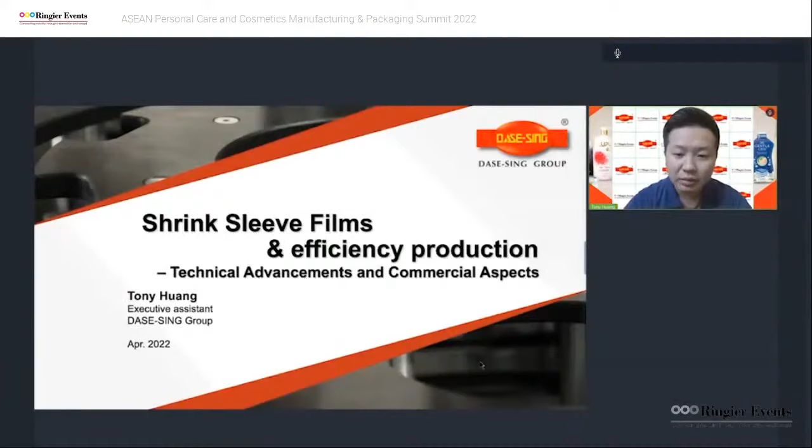Firstly, the presence of DASE-SING. We have 3 factories: one in Chiayi, Taiwan, one in Hsinchu, Taiwan, and the last one in Shanghai, China. We have been established since 1985, we have 200 plus employees, and we have marketed in more than 80 countries.

So now brands are looking for ways to engage with consumers and increase return on marketing investment, cut cost, and optimize the supply chain. Also connect digital campaigns with the real products, reduce time to market, and be eco-friendly, which is the big issue right now.

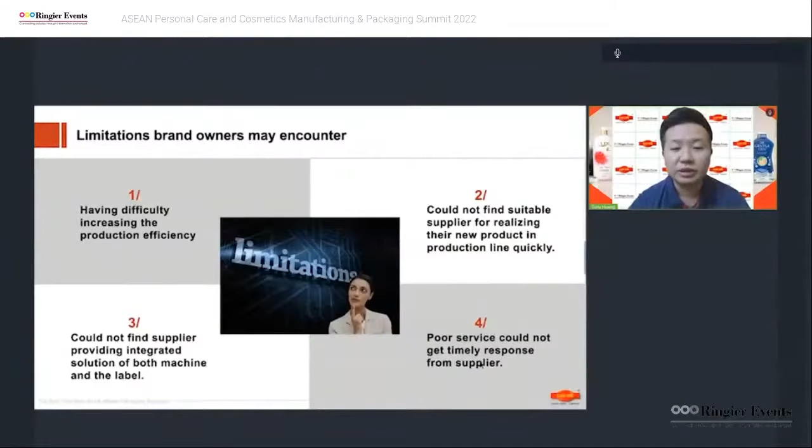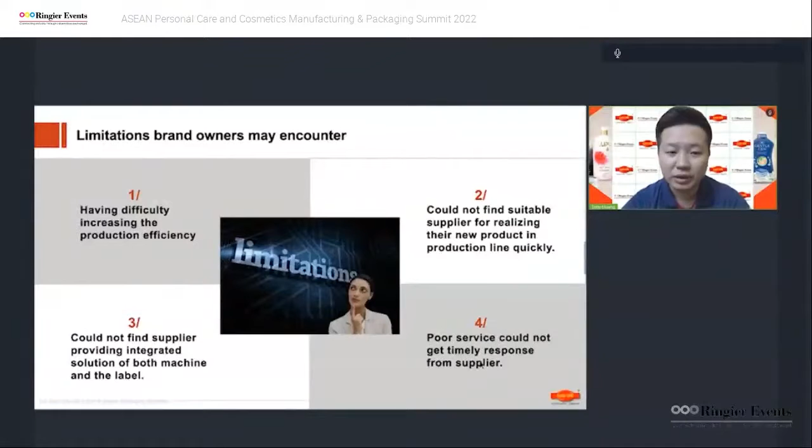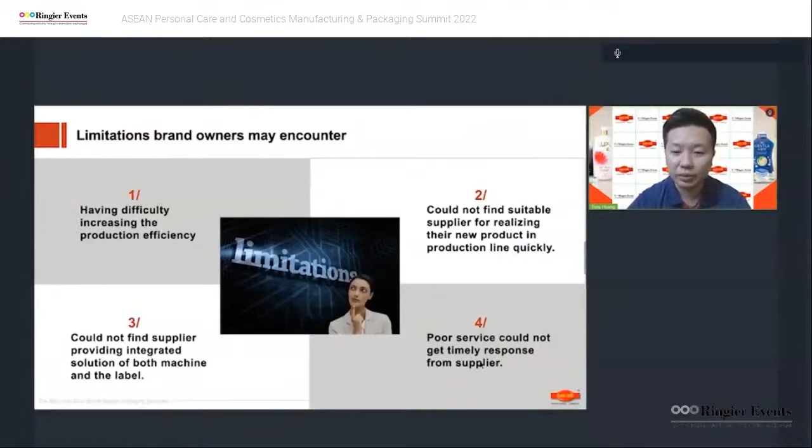Here are some limitations that brand owners may encounter. Firstly, having difficulty increasing the production efficiency. Secondly, could not find a suitable supplier for realizing their new product in production line quickly. The third one will be could not find a supplier providing integrated solution for both machine and label. Lastly, poor service, could not get timely response from supplier.

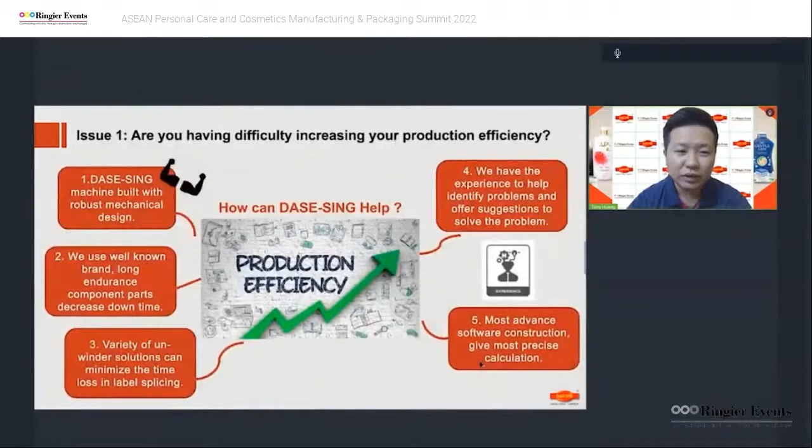So for the first issue, how can DASE-SING help? Firstly, DASE-SING machines are built with a robust mechanical design, and we use well-known brands of components which provide long endurance to decrease downtime.

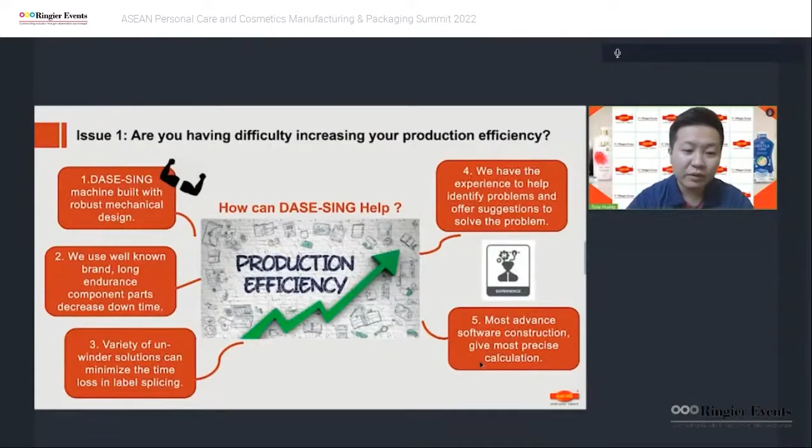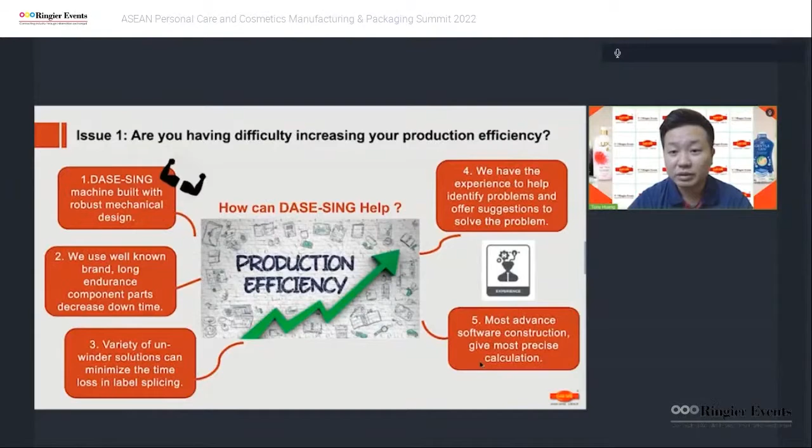We have a variety of unwinder solutions that can minimize the time lost in label splicing. We also have the experience to help identify the problem and offer suggestions to solve it quickly, as we have experience in both machine and label. And lastly, because we have the most advanced software construction, we give the most precise calculation.

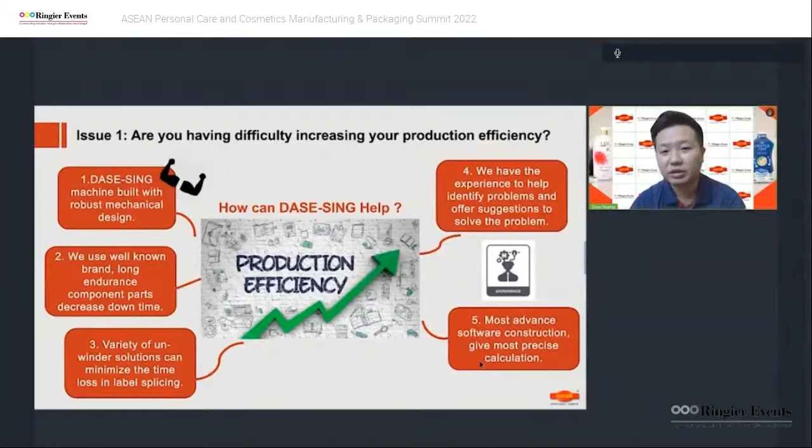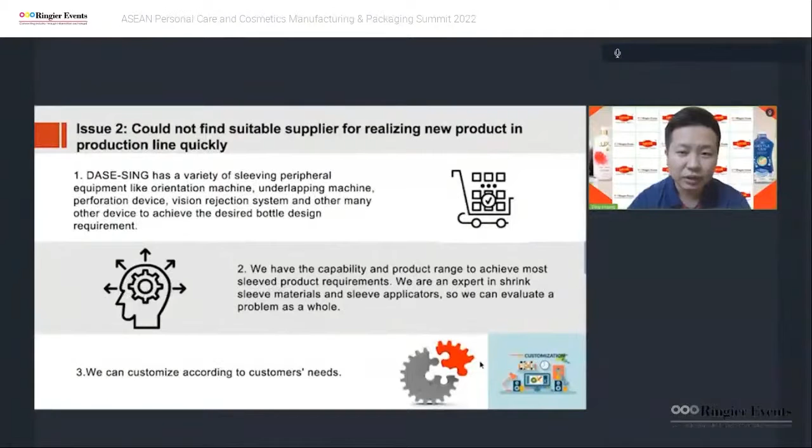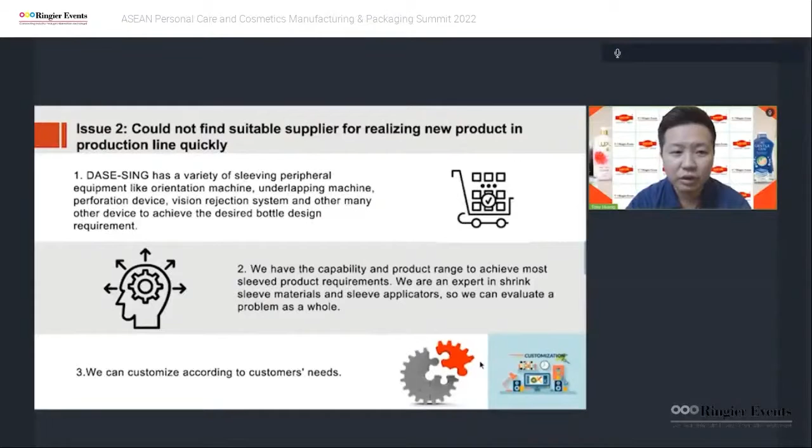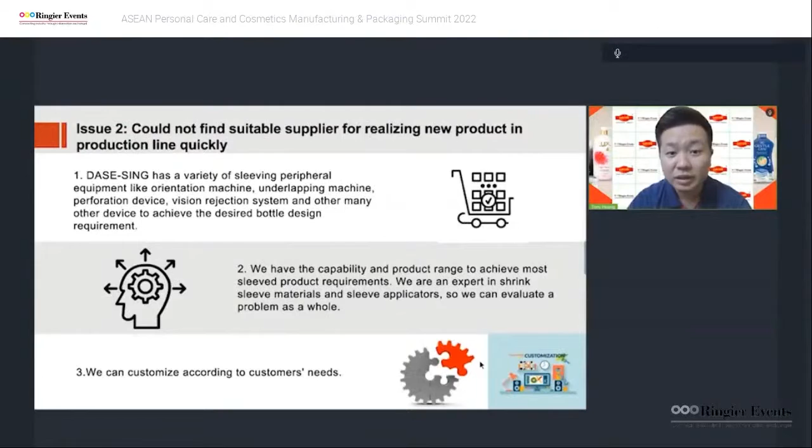The second issue: could not find a suitable supplier for realizing the product in the production line quickly. Firstly, we have a variety of sleeving peripheral equipment like orientation machines, underlapping machines, perforation devices, vision systems, and many other devices to achieve the desired bottle design requirement.

Second, we have the capability and product range to achieve most product requirements. We are expert in shrink sleeve material and sleeve applicators, so we can evaluate a problem as a whole, then customize according to the customer's needs.

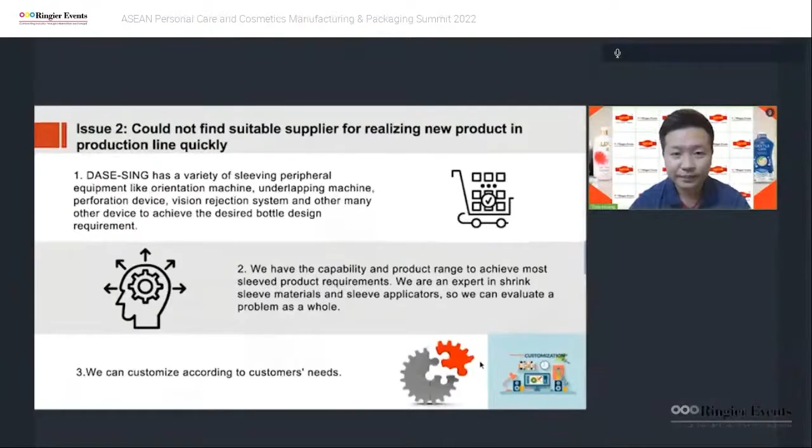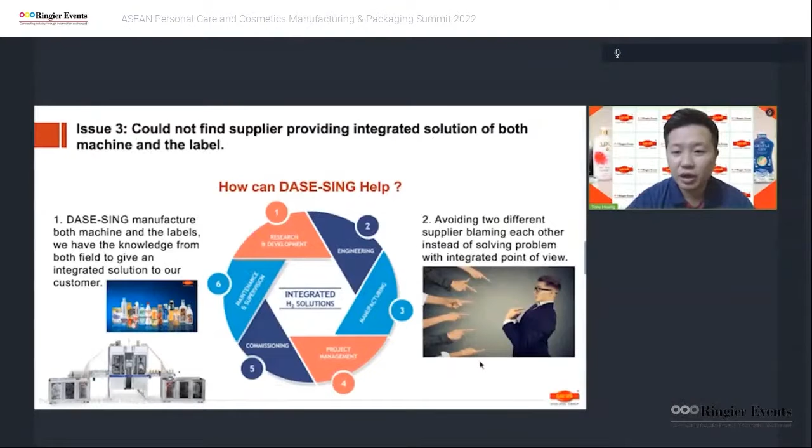The third issue: could not find a supplier providing an integrated solution of both machine and label. How can DASE-SING help? As I mentioned before, we manufacture both machine and label, so we have the knowledge from both fields to give an integrated solution to our customer, so you can avoid two different suppliers blaming each other instead of solving the problem with an integrated point of view.

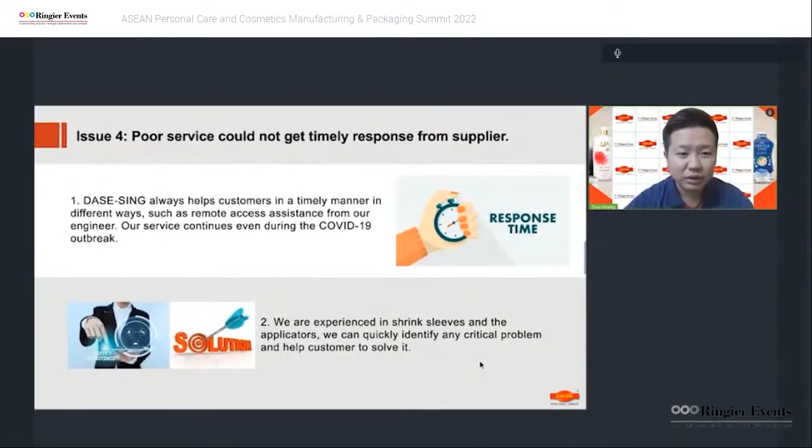The fourth issue: poor service, could not get timely response from supplier. DASE-SING always helps customers in a timely manner in different ways, such as remote access assistance from our engineers, and our service continued even during the COVID-19 outbreak. So we never stop our service.

We also have experience in shrink sleeve and applicator, so we can identify any critical problem and help customers solve it quickly. Because when you have different suppliers, sometimes the service can be inefficient because they might blame each other for different problems. For example, the machine supplier will say it's a label problem, the label manufacturer will say it's a machine problem. So you never get an integrated view of the solution.

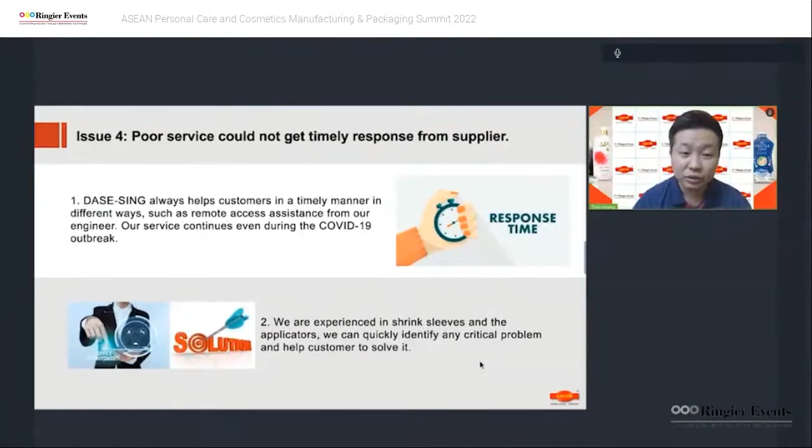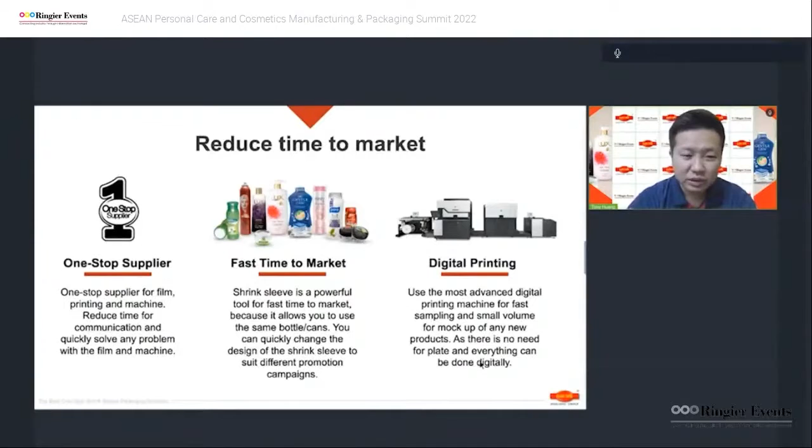And then it will be fast time to market. Shrink sleeve is a powerful tool for fast time to market because it allows you to use the same bottle design and quickly change the design of the shrink sleeve to suit different promotion campaigns.

Also, digital printing is another reason for fast time to market because you can print a sampling with a small volume to mock up any products, and there's no need for a printing plate. Everything can be done digitally, so you can also save a lot of time and cost as well.

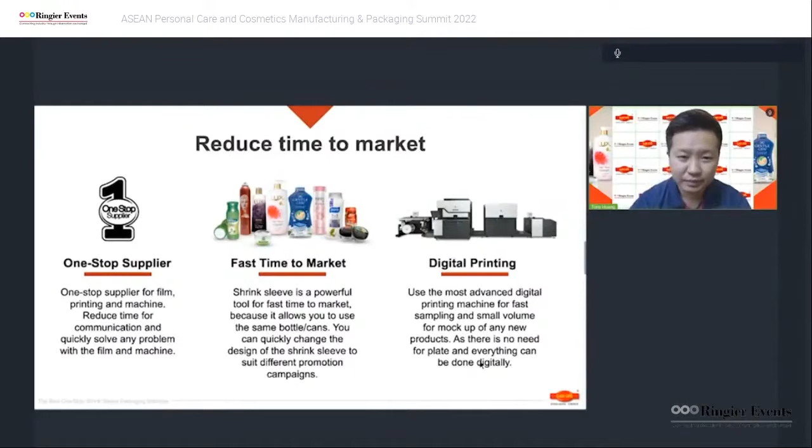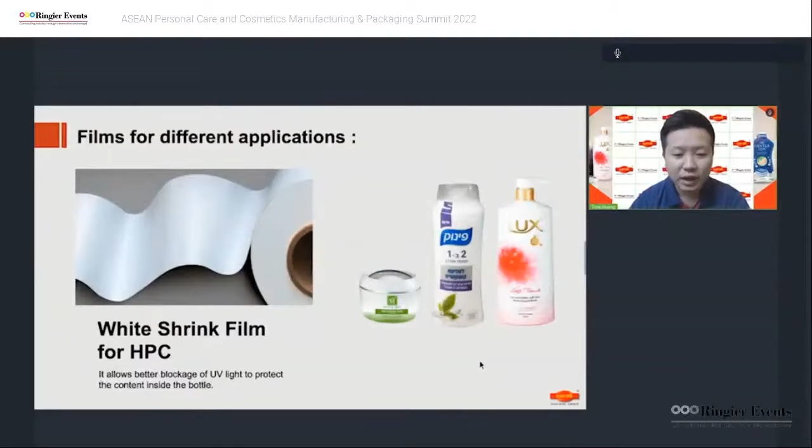So here's some film application for different bottles, and this is the white film for HPC. It allows better blockage of UV light to protect the content inside the bottle.

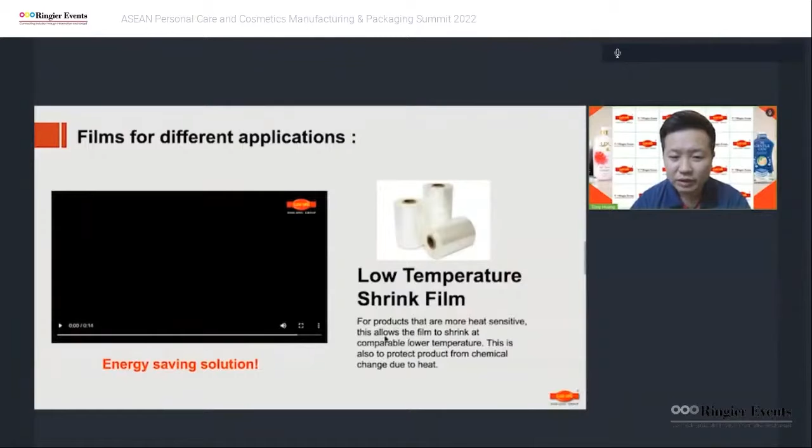And this is the low temperature shrink film. This is especially for products that are very heat sensitive. So here's some video about milk powder.

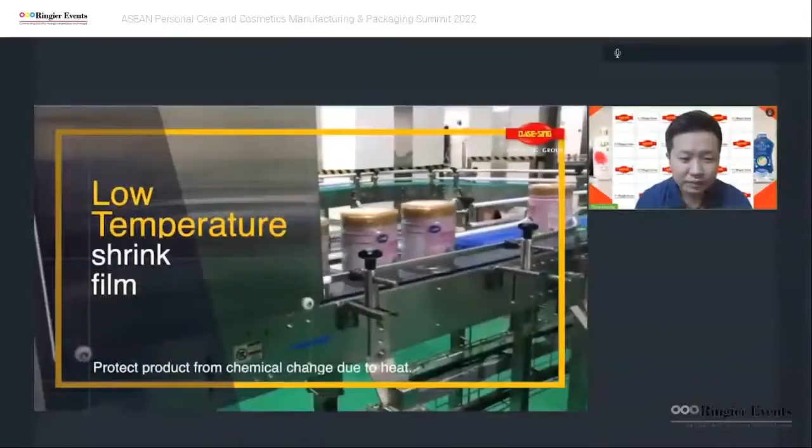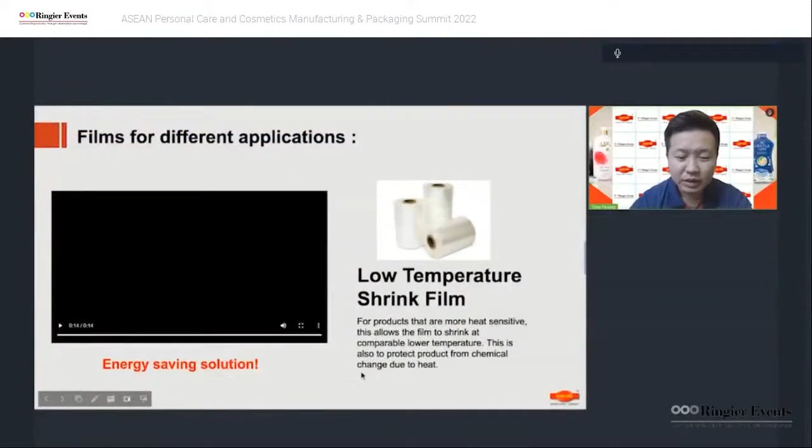Okay, this customer bought more than 10 machines for only this milk powder line.

And for reducing transportation cost, a lot of customers are switching from glass bottle to PET bottles, and you can reduce a significant amount of weight in transportation and minimize the influence on environment. The other way is the thickness of a PET shrink sleeve can now be reduced to 30 micron, a 25% decrease compared to 40 micron as original thickness. This allows brand owners to reduce production and transportation cost. PET can also be recycled, so there's no problem with the sustainability of the packaging.

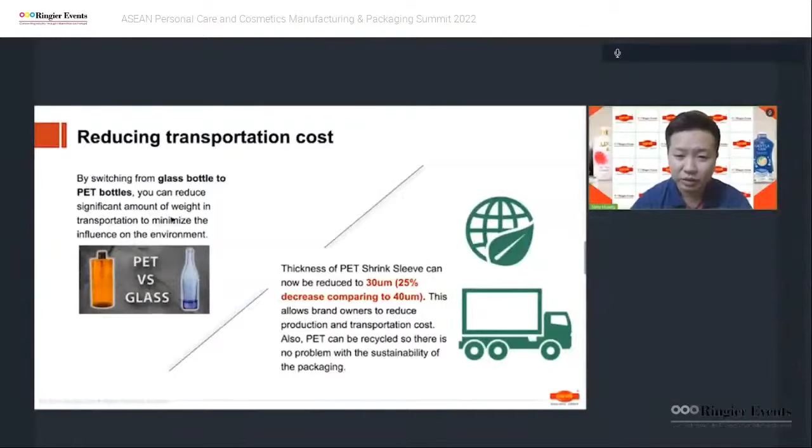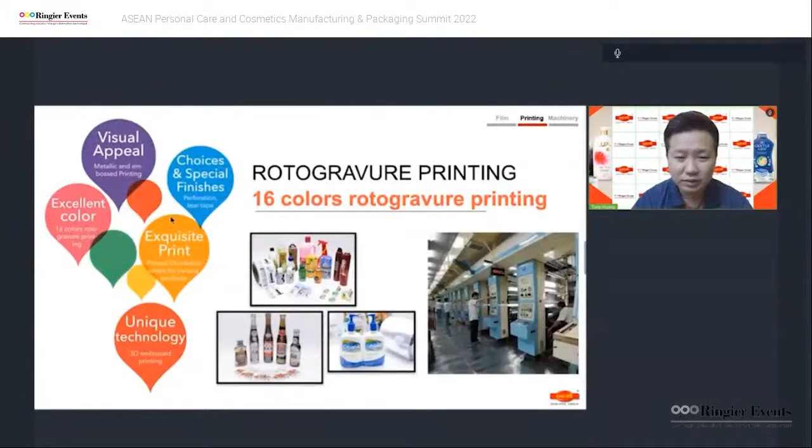So here's some of our core business for film printing and machinery. First, the printing machine, we have the rotogravure printing for 16 colors. Here's some of the products that we can do with the rotogravure printing.

On the top left, there's shrinkable tube sleeves. This can be applied for HPC products, tube products. And then we have the shrink sleeve label for various bottles, like embossed tactile printing labels, two-side printing labels, PE or POF multi-function films. We can provide a variety of products.

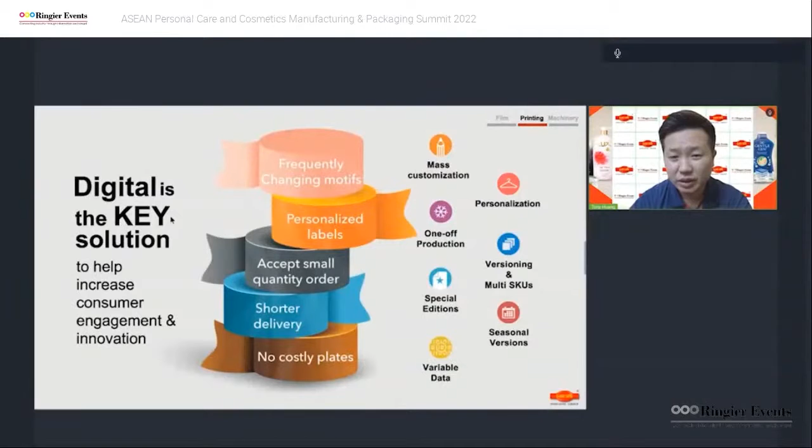Here's some ideas for digital printing. It allows you to have mass customization, one-off production, special editions, variable data, personalization, versioning, multi-SKUs, and also seasonal versions.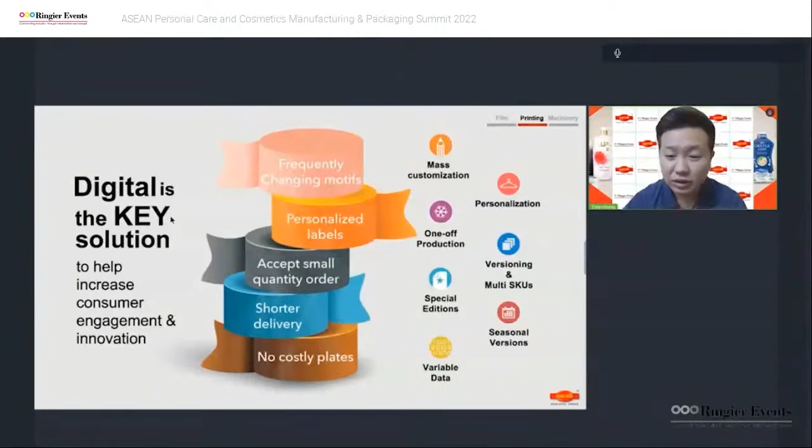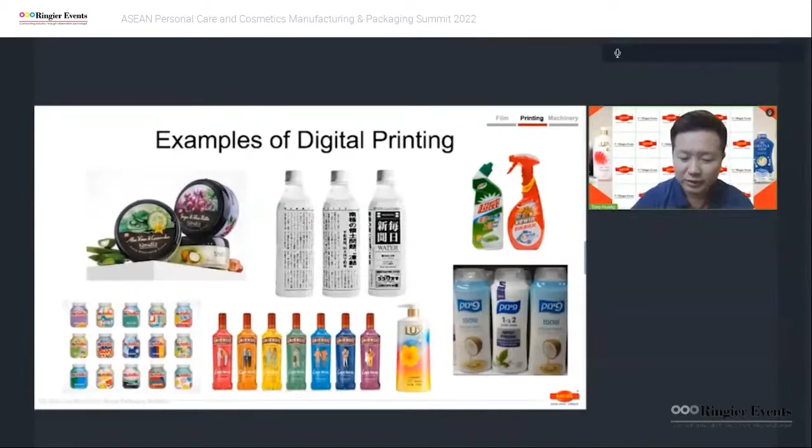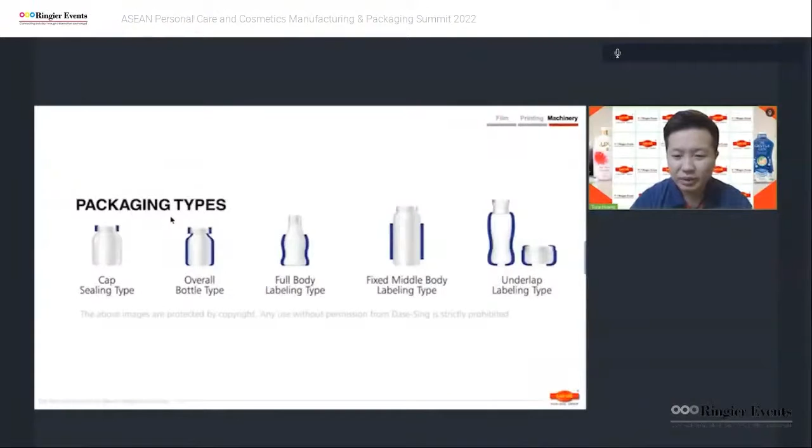Here's some packaging types that we can do with our machine: cap seal type, overall full body, fixed middle body, underlap labeling, and also some orientation as well.

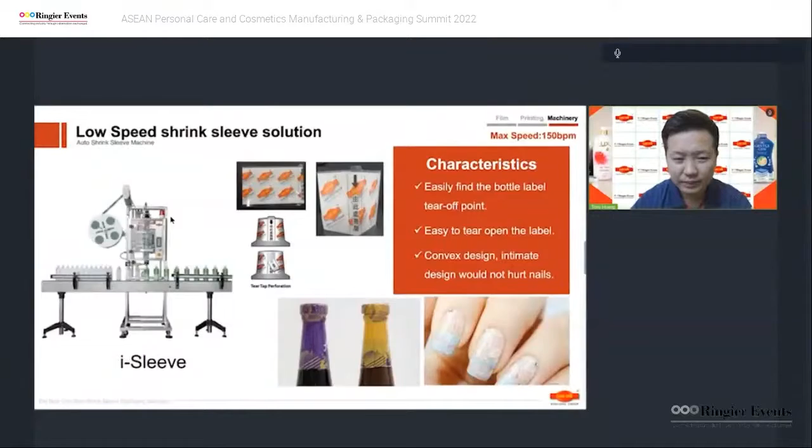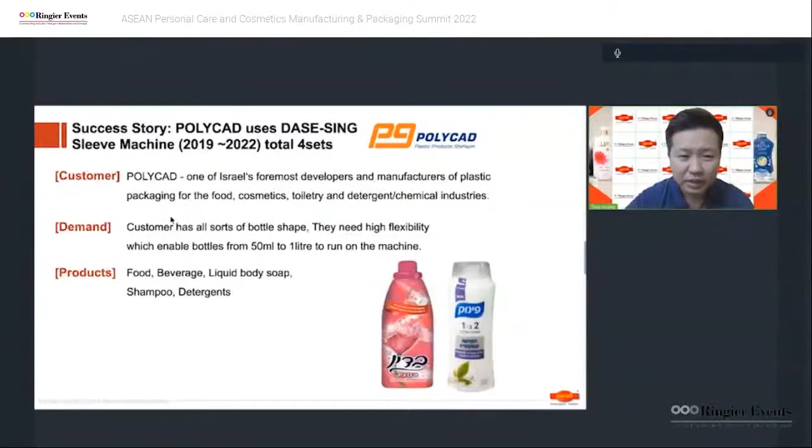We have a successful story for the machine. This is a customer in Israel called Polycad, the foremost developer of manufacturing plastic packaging for food, cosmetic, toiletry, detergent, and chemical industry.

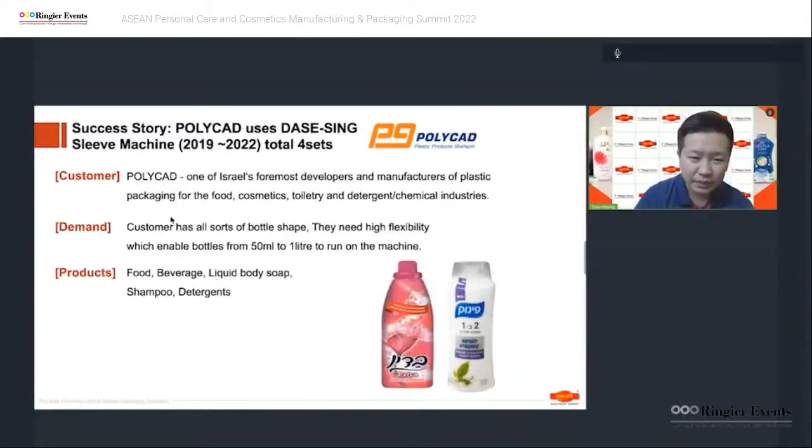The customer also has various bottle shapes, and they need high flexibility to enable bottles from 50 milliliter to 1 liter to run on our machine.

So they bought a full machine with this model, a 200P2 applicator with a 2.8 meter steam tunnel. Everything, the steam pressure, can be adjusted outside the tunnel, so you don't need to stop the tunnel to adjust. It saves a lot of time.

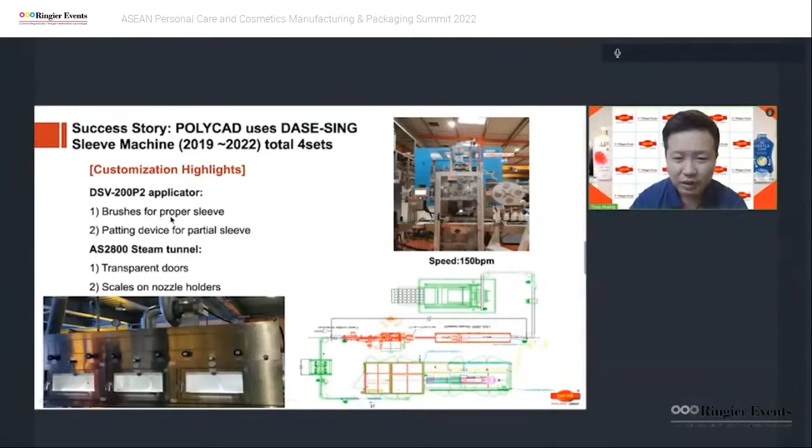We also have very high flexibility, as they have many different product shapes or sizes, as you see in the photos. So high flexibility, professional solution, and innovation.

Professional, because we have long experience in this sensitive field, and we always give our customers the easiest application explanation to help solve their issues. Innovation is that we always provide feasible solutions for our customers' innovation, and we also contribute ideas to their innovation as well.

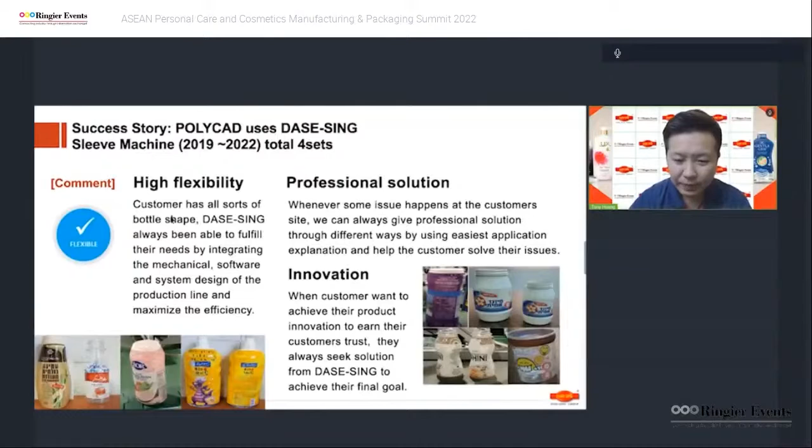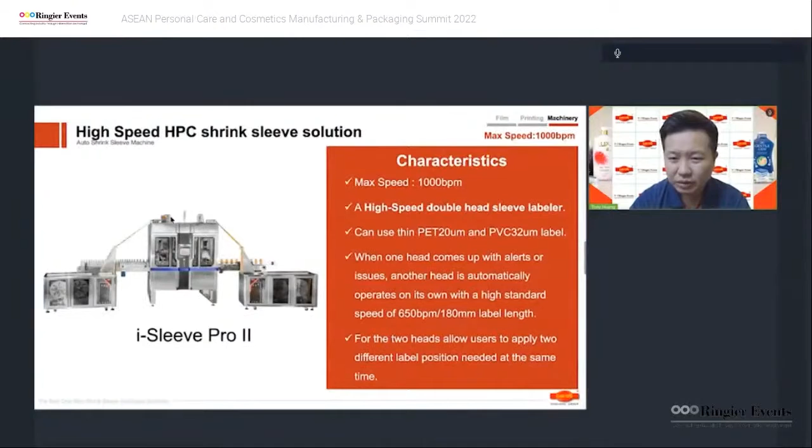Here's a high-speed HPC shrink sleeve solution with the i-Sleeve Pro II. It can run up to 1000 BPM with a two-head machine, and you can use thin material as well. But the thinner you go, the speed will decrease accordingly.

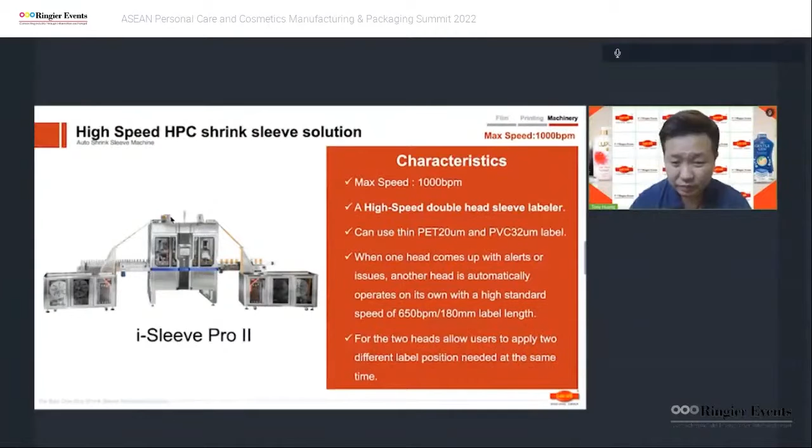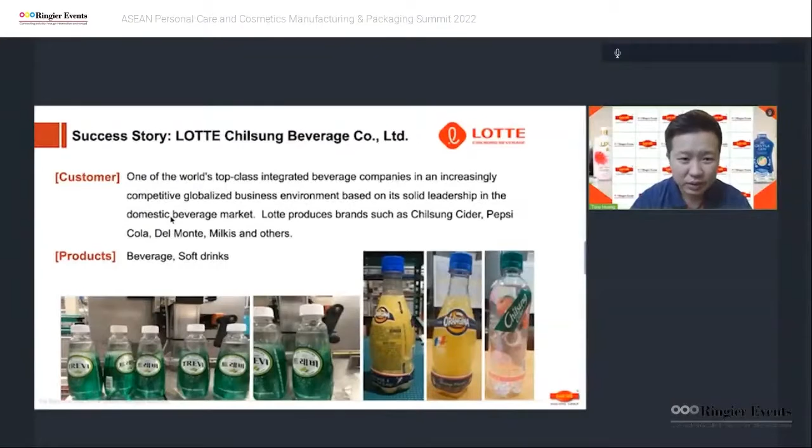Here's one of the high-speed lines that we did with a customer in Korea, called Lotte. They provide beverage and soft drinks, and are a top-class integrated beverage company with a solid leadership in the domestic beverage market.

They bought the single head machine and also double head machine, running from 500 to 720 BPM.

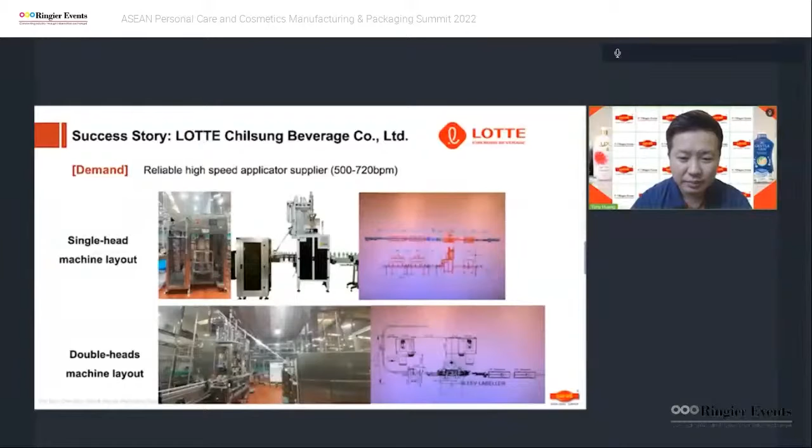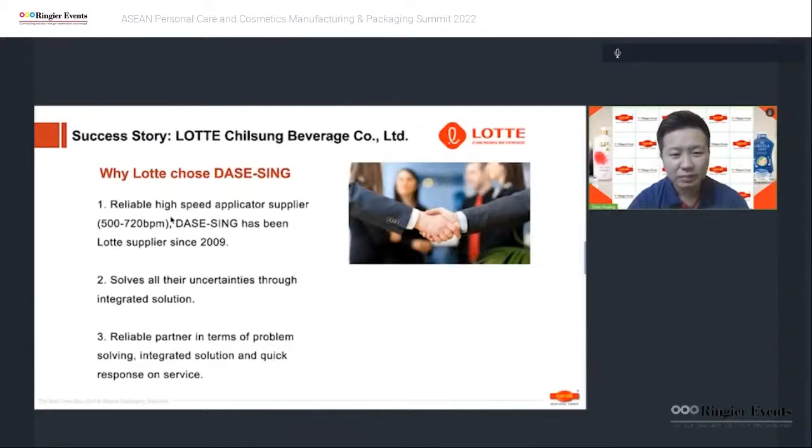So why does Lotte choose DASE-SING? Because we have a reliable high-speed applicator that runs from 500 to 720. We can run even faster, but this is based on the requirement they needed. We have been their supplier since 2009.

Secondly, we solve all the uncertainty through an integrated solution of machine and label. We are a reliable partner in terms of problem solving, integrated solution, and quick response on service.

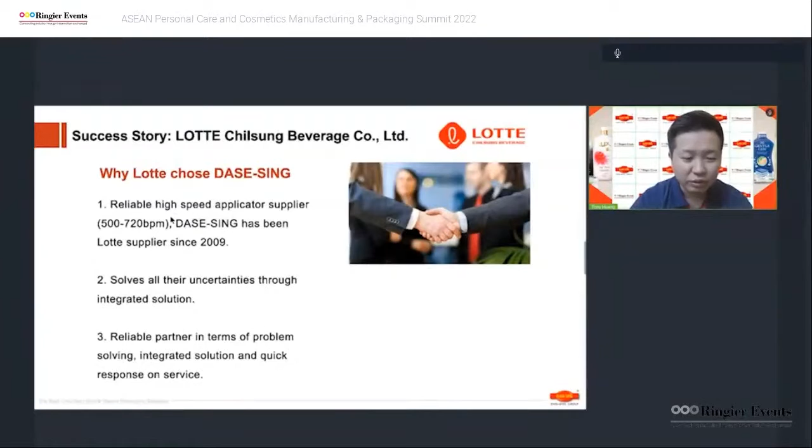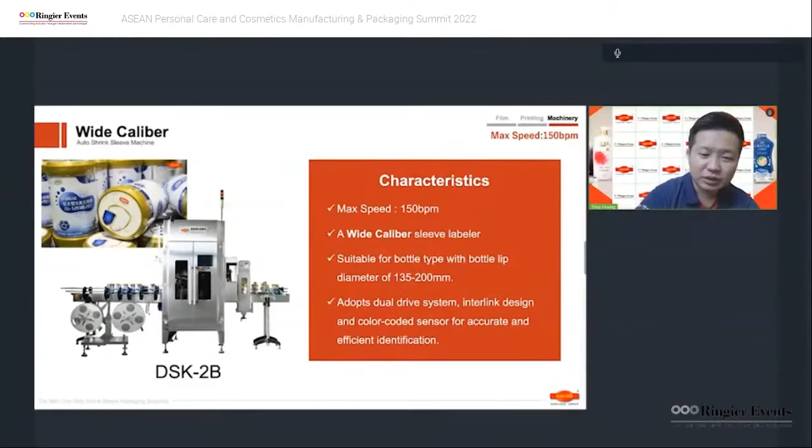So next one we have a wide caliber machine. This is for large size sleeving machine, can run up to 150 bottles per minute. We have sold this machine to milk powder customers.

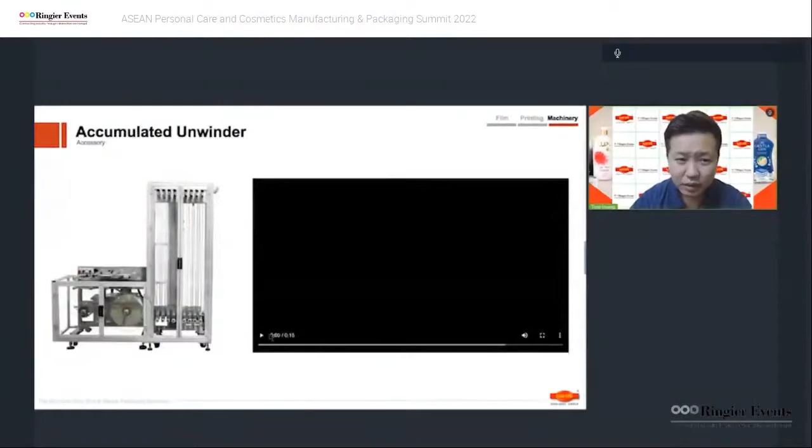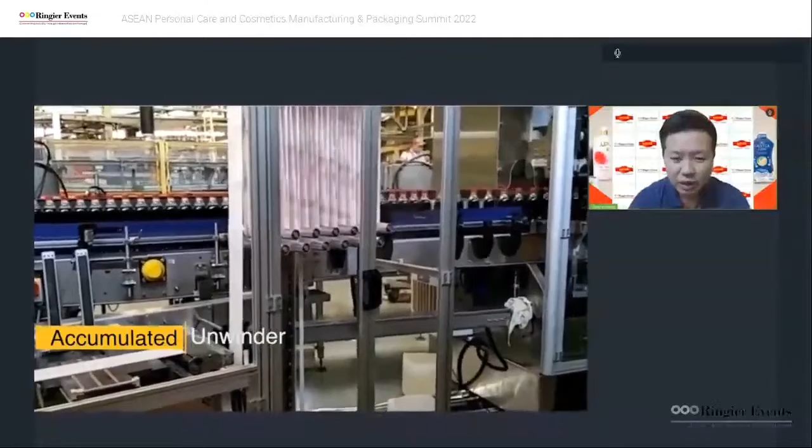And this is one of the accumulators available for the machine. You can see the label can be spliced without stopping the machine. This is in the Coca-Cola plant.

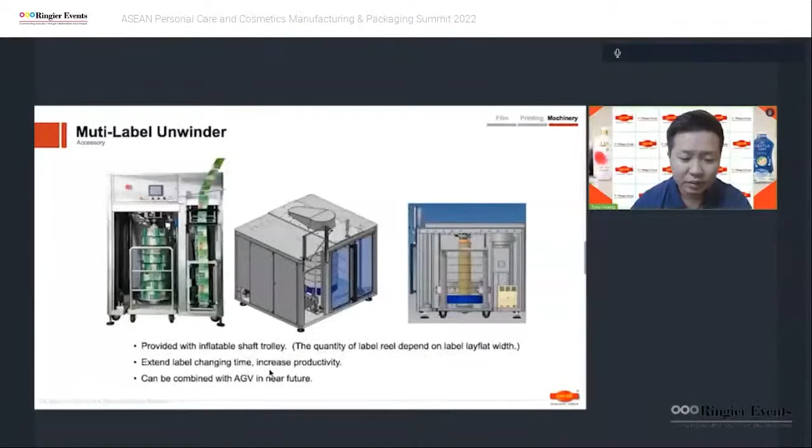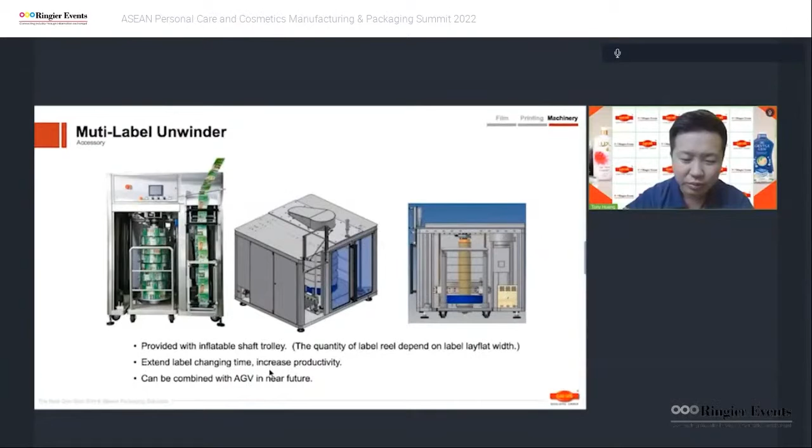And this is another type of unwinder, a multi-label unwinder. We provide eight labels connected together, so you can extend your production time. Also, in the future, it can be combined with AGV.

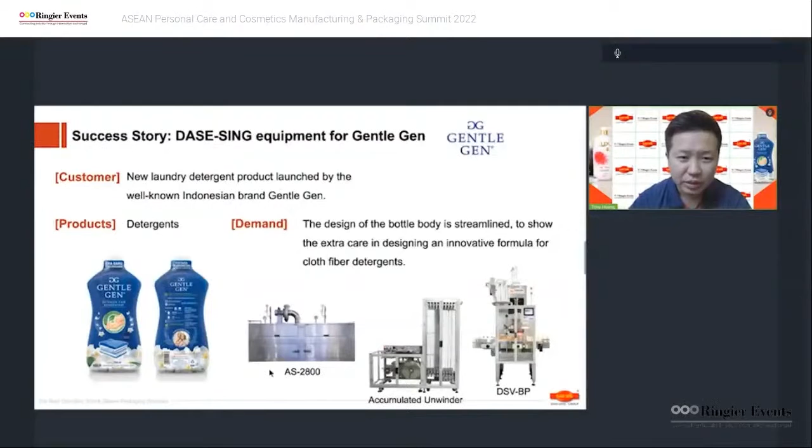Then DASE-SING equipment for Gentle Gen is another successful story. This customer produced laundry detergent products launched by a well-known Indonesia brand, and they bought many machines, a single head machine with accumulator unwinder with a 2.8 meter steam tunnel. You see on the left is their final product.

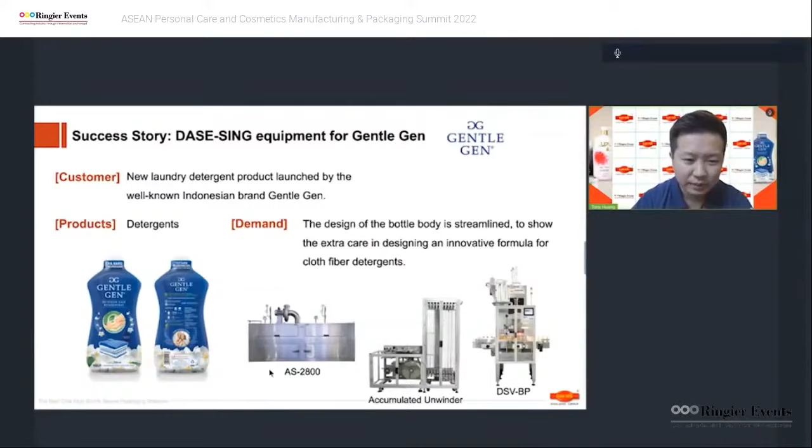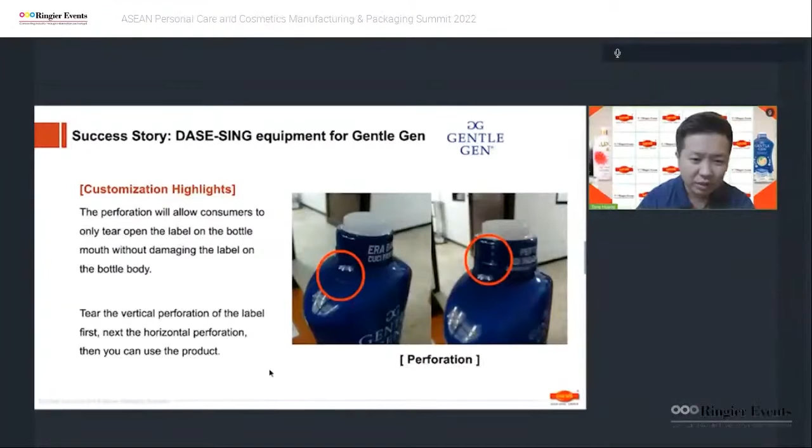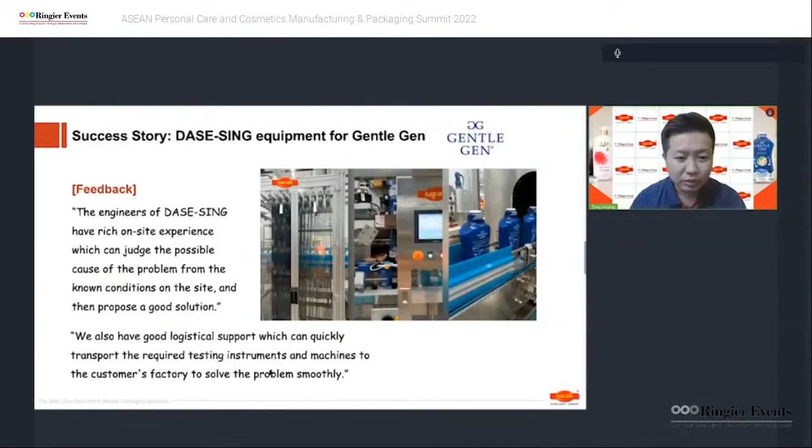This is feedback from the engineer, and the customer told us that the engineer of DASE-SING has rich on-site experience, which can judge the possible cause of the problem from the known conditions on site, and then propose a good solution. We also have good logistic support, which can quickly transport the required testing instrument and machine to a customer's factory to solve the problem smoothly.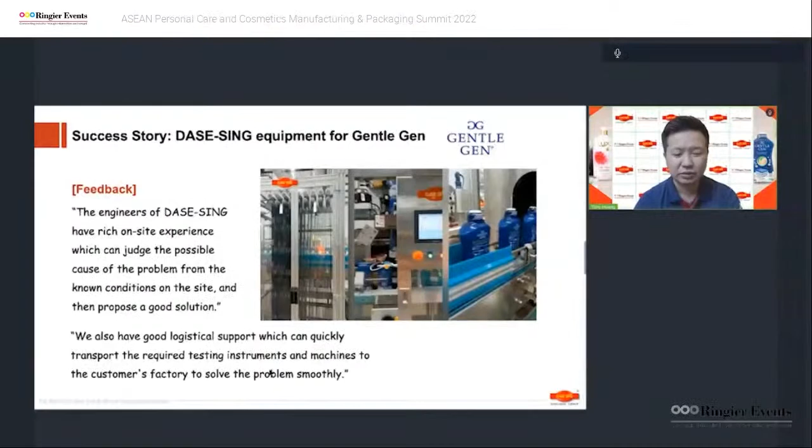Then here's the underlap machine. So when a customer wants to have the label cover the bottom of the bottle, you can use this kind of technology. You can see in the photos.

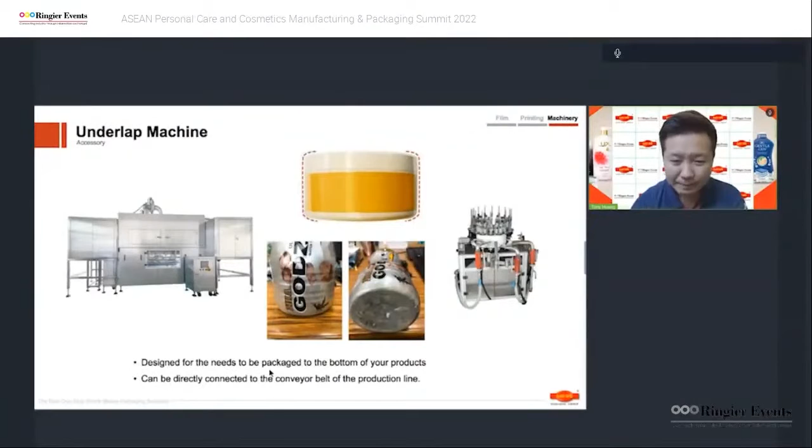Here's another successful story, and it's the underlap sleeve accessory for Dabur. Dabur is a health supplementary product from a well-known brand in India, and you can see the photo on the left. This is the final product.

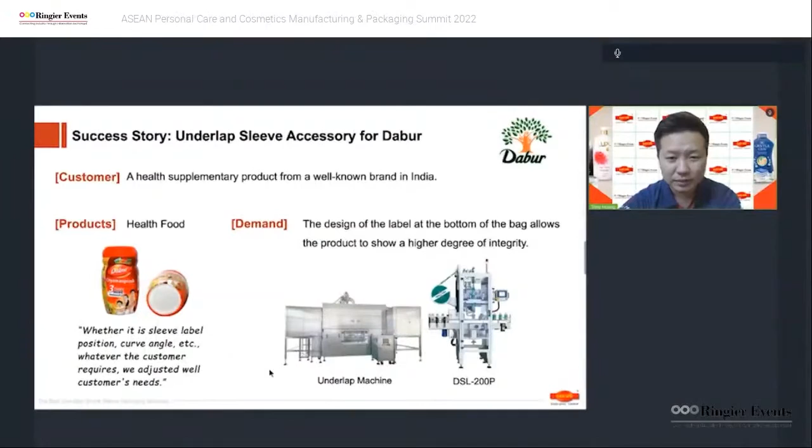In this case, they have a DSL-200P applicator machine with the underlap machine running around 200 bottles per minute. So we still have a new project with them recently as well. We continue as long-term partners for their new products as well.

And this is a bottle orientator for orienting the bottles. This allows the bottle to match with the label design. You can see some of the examples here, and the video here.

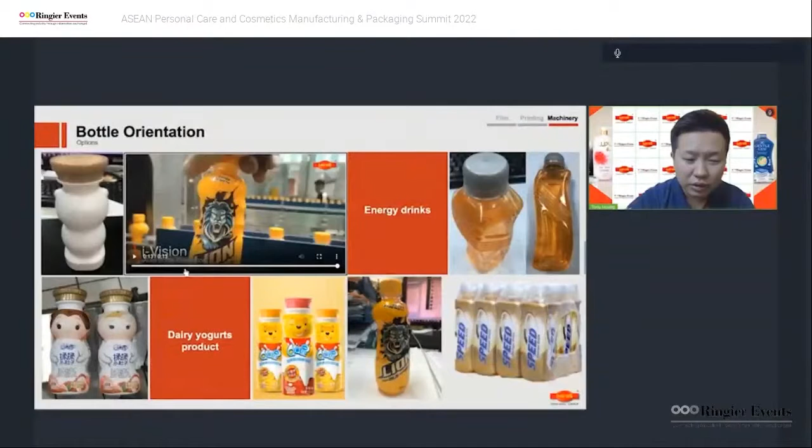So they do this orientation because they want the consumer, when they drink, to always see the label, the logo, on the same side. So they have a consistent brand image. You can see this is some of the bottles from our customer project.

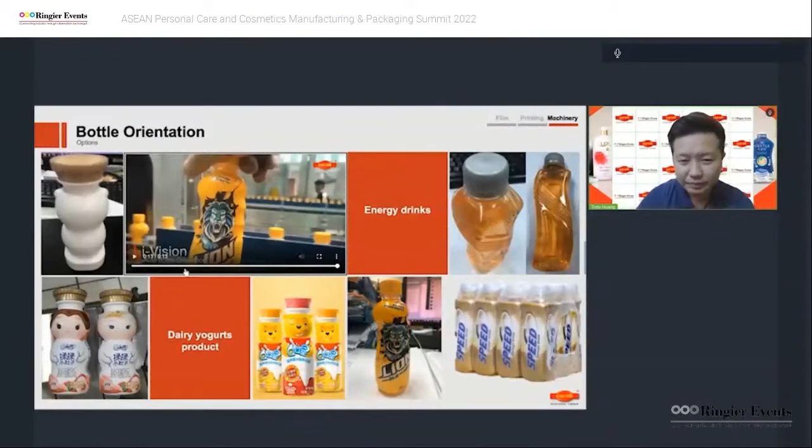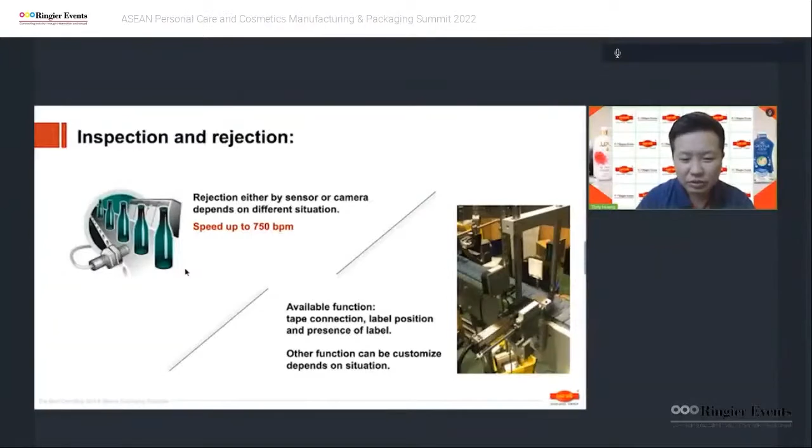We also can do inspection and rejection up to 750 bottles per minute. We can do tape connection, label position, and presence of the label. Other functions can be customized, depending on the situation.

Then we have data collection for Industry 4.0, this is called the OPC UA Signal Exchange Protocol. A lot of turnkey companies have been using this protocol with us, so this makes the data exchange easier.

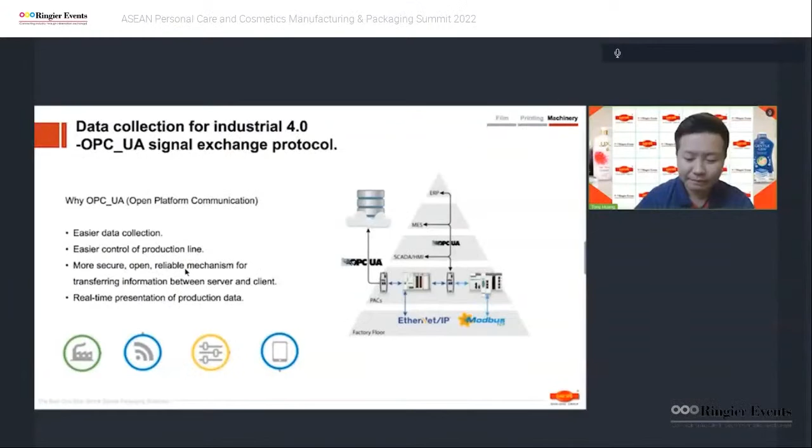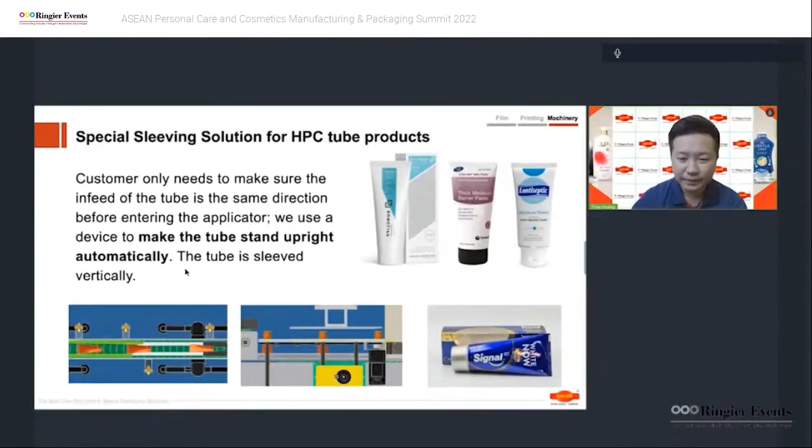And here is some special sleeve solution for HPC tube products. The customer only needs to make sure the infeed of the tube is in the same direction before entering the applicator. We use a special device to make the tube stand upright automatically, and the tube is sleeved vertically. You can see the picture at the bottom showing some idea of this application.

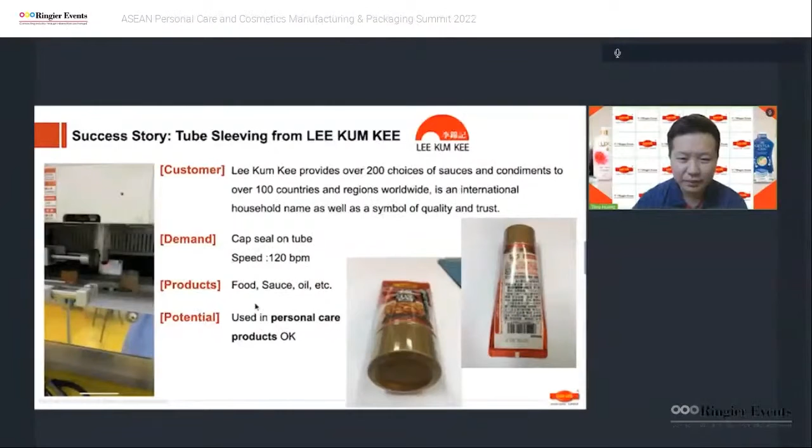And then this is the actual successful story for this application. This is Lee Kum Kee, who has over 200 choices of sauce condiments over 100 countries. They do a cap seal on a tube with 120 BPM. And this can also be used for personal care products.

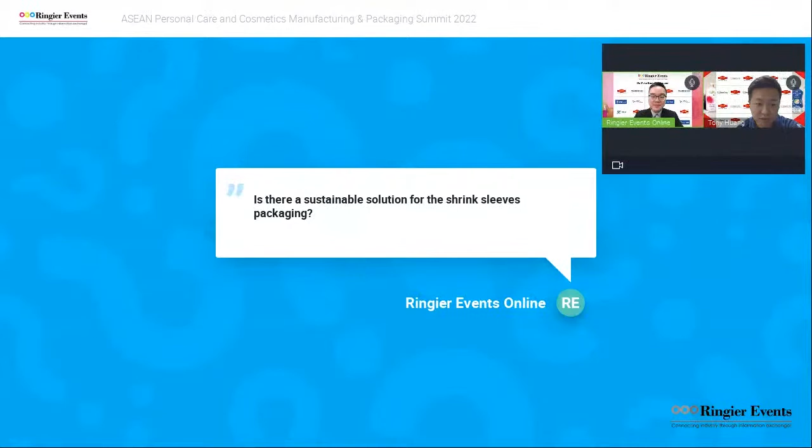Is there a sustainable solution for the shrink sleeve packaging?

There are a lot of suppliers trying to create different ways of sustainable packaging. There are a few solutions like perforation on sleeves, which we already know is quite common, but there's a new application like PCR shrink sleeve material and wash-off inks at a certain temperature, and also self-opening seams, which open up automatically when washed off in a certain temperature of water or liquid, without any manual work.

So they will be easier for recycling. The other one is LDPET, a low density PET material, which can float during the recycling process. There are many other solutions still being developed, but many of these will be used in mass production in the near future. Right now it's still costly because it's not very common, but I think it will get more economically feasible in the future.